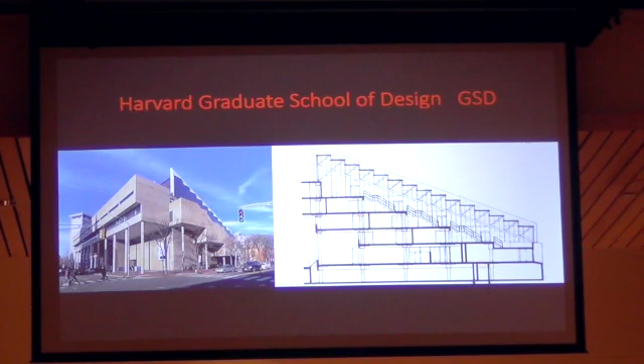That's the process I went through, and more or less you're going to see how it worked out in my case, because there's a lot of knowledge production in my case, and possibly very little design production, as it turned out by the facts of life, the way my life actually developed.

The first building I worked on was with a firm called Cambridge Seven Associates.

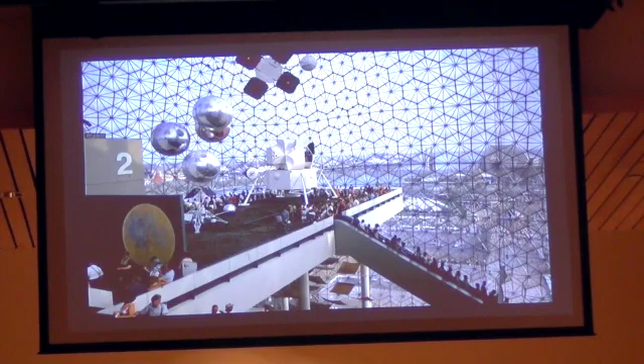One of the nice things I happened to do—actually, I must say I didn't do much of the design. A young designer working in a large office like this is primarily working on construction documents, working documents. So you get the opportunity to work on the details in such a way that you can also be creative in the details. For example, I designed, among other things, the railing, and on the inside of the railing you got all of the text describing all the elements in the pavilion. It was a very, very dramatic pavilion where, in fact, you're just moving through the air. You separate the problem of shelter from the problem of content, and that's why it was a very brilliant building—it's still standing today.

I then moved, after about 2 or 3 years, to another office, just to gain the experience of another office. It was called Sasaki, Dawson & DeMay—I think it still exists in Watertown as Sasaki Associates. It was an incredibly unique firm for being one of the first integrated practices in the United States, integrating architecture, landscape architecture, urban planning, and urban design—4 subjects working together to create projects, usually at a very large scale.

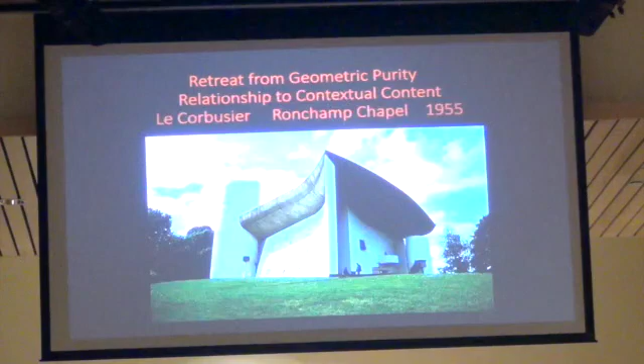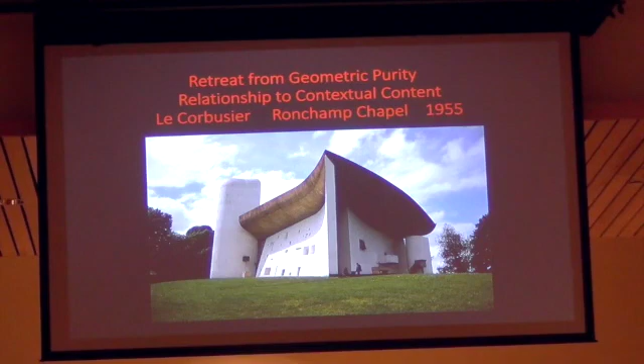So postmodernism tried to free things up. And it, by the way, became a cultural phenomenon. Postmodernism was not only in architecture, but it was in literature - postmodern literature, very, very famous, I think. And many other fields were transformed in the 1960s. The 1960s, not only the Beatles, but it was a great intellectual production during that period.

Learning from Las Vegas tries to take the theoretical part of this little book for a moment and turn it into practice, by coming up with an idea that he calls the decorated shed. The decorated shed - what does that mean? You could take a very, very simple building and be free on the outside. You could make a functional building, but decorate the outside any way you wanted to.

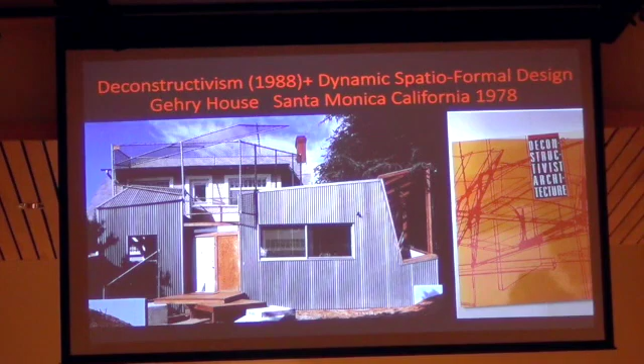So it starts by being iconoclastic. It starts by using new approaches to spatial design. It's not rectangular usually, it's quite angular in nature. And so the famous building, the so-called Miracle of Bilbao, another museum - the Bilbao Museum.

It's not stainless steel, it's titanium. Who knows titanium if you're not doing an airplane? You don't know much about titanium. In fact, this man works as a sculptor.

On most of his buildings he uses and promotes computer-aided design. He's one of the leaders, Gehry Systems it's called, one of the leaders in computer-aided design until today. And they did it on the basis of a system called CATIA, which was a French system that was used to make airplanes.

So in order to produce these buildings, you had to have computer-aided design. You could never do this kind of thing except by doing it with - they say Frank Gehry makes paper designs out of cardboard, you could only do it with cardboard, you could never do it without computer-aided design. So computer-aided design in the background of this revolution is making another kind of revolution for architecture. In the background, this horse is running.

I better move on fast so you can see the complexity and the spatial complexity. This gorgeous building, 2002, where the engineer Cecil Balmond is a great engineer with a fantastic firm called Arup, working with a Japanese architect called Toyo Ito.

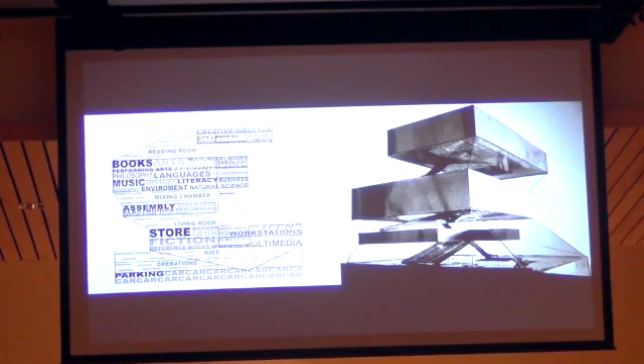It's very interesting because the program is written on the left, and you can see it's a series of pavilions in the air. The lines of structure connect those pavilions. So here the complexity is joining between the... sophistication is too much for me.

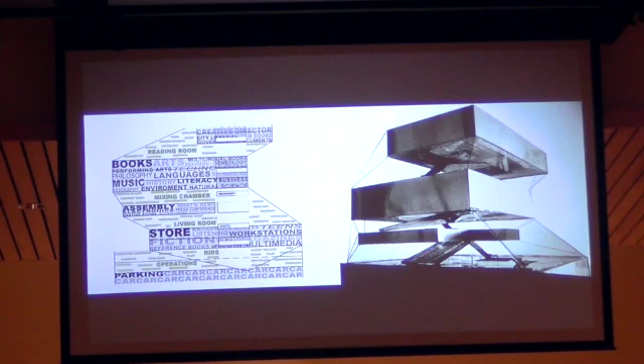The major parts of the library are closed, and then the open parts of the library that enjoy the view as well as reading, etc., are connected by the lines of the facade. So now I go back and just show you the facade for a minute. That's a rather beautiful building, despite the fact that it's very complex geometrically.

And in Israel in 2005, Moshe Safdie, the same year, is producing the Yad Vashem that I'm sure all of you have seen or heard of.

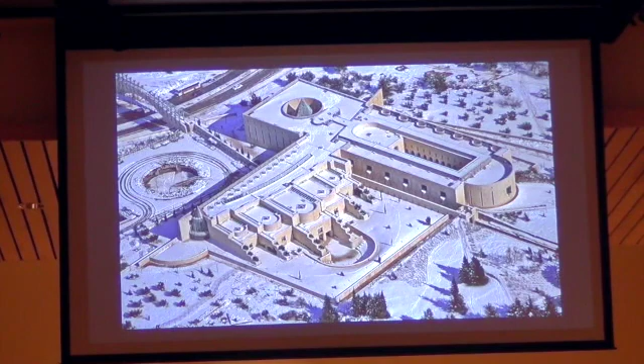Here you see it in the snow, so it's great - not only can you see the different organization of the building, but it's a really fantastic photograph of the building in the snow. So what do we have? Obviously it's not the usual courthouse. The courthouse is one of the most serious of monumental buildings everywhere in the world.

In this building, suddenly, it's kind of floppy. It's opened its wings to the environment, really. What you have here is basically - those of you who have seen it - it almost has no entrance. Whereas it should have a monumental entrance, it has no entrance. The counter logic of postmodernism is one of the things that's interesting. It makes you contemplate how the building is put together.

But very, very briefly, because I see that maybe here I'm getting along to the end. Well, I'm going to have to do this quickly. The parts of the building are - the entrance is on the side, you come through this main block. These are the major courtrooms. This courtyard is here. I'll show you in a minute these pieces.

This is the courtyard. It's completely classical. You see there are funny distortions. If your eye has now become able to understand how this work is taking place, you have unexpected sizes. And they're always playing with the keystone for some reason - the keystones are being large. The window is expanding in a strange way. So there are always special kinds of artistic treatments in postmodern buildings.

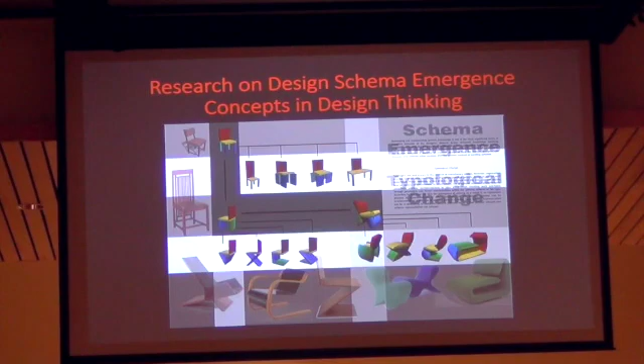This is another drawing. The basic idea was to research the thinking related to schema and type in design. Another work she did involved morphogenesis, or how nature designs. You're going to see this a lot in the way my daughter works. This is one of the important things about her work.

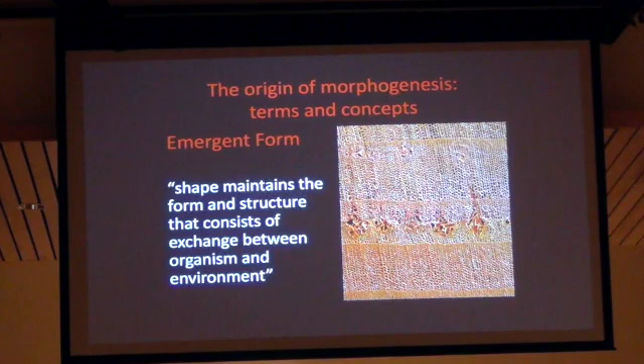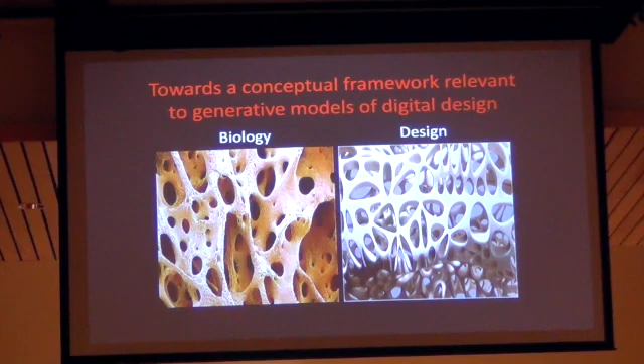How nature designs, and how this section of a tree shows that some event in the history of its growth produced this pattern. So there's a pattern of morphogenesis that exists in nature, and how can this help us understand how design might work, for example biology, bone structure on the left, and design on the right. How can these two things begin to come together? Those were part of her research works.

A third one, morphogenetic design. She also studied how architects use experimental designs. This was the great German engineer and architect Frei Otto, and what it turned into was designed on the basis of the model. She showed the model because she went to the University of Stuttgart, where they still have this research laboratory, and they only work with models. How can designers work with models?

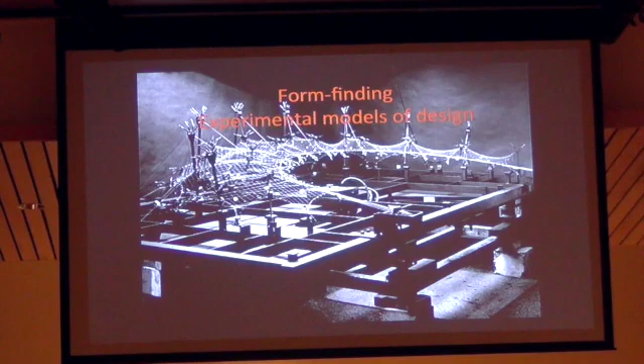Because he was really a master of working with models like this in order to design fantastic lightweight structures. It was called ILS, the Institute for Lightweight Structures. And this is, I don't remember, one of the Olympics in Munich.

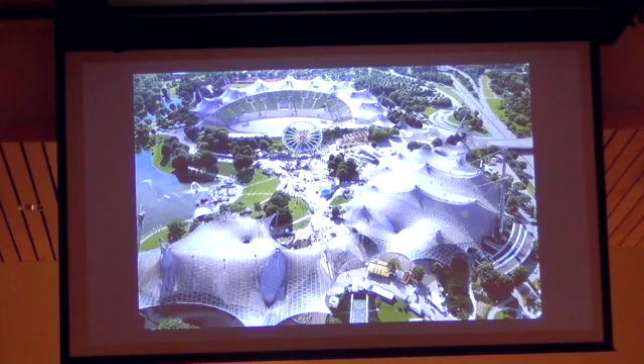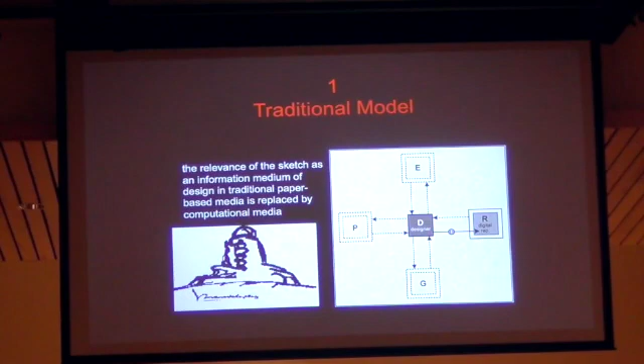Then she came up with a series of computational schema, or a diagrammatic approach to the way design takes place, with the designer in the center. He represents, he generates, he studies performance, and he evaluates. Going through this process in various ways, using students and professional designers, she came up with a series of designs based upon the conventional method of sketch design and so-called performance-based design.

In November 2017, just 24 months ago, for her research she received a doctor honoris causa from a great architectural school in Barcelona, which is super unique. I don't think there are many at the Technion, there's no one in our faculty. At this university, she was the first woman and the first architect to receive that distinction. So the work was recognized around the world.

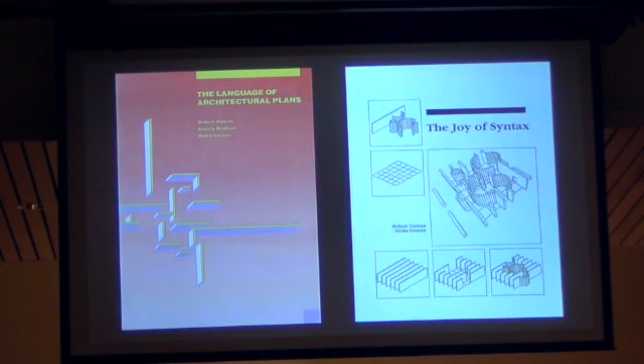This, just fast, some of our books. We did nine books together. And a little view of something that we designed.

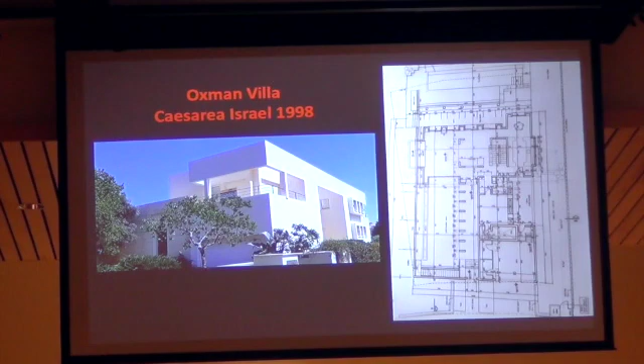It's a courtyard house, an L-shaped house around the courtyard. This is the view of the entrance, stone and stucco together. And just quickly, the entrance, the courtyard—it's got this long bench running the full length of the courtyard.

I was very interested in minimalism in design, another sub-form of postmodernism, minimalism. I still love it. This is the interior. It's got a thick wall because there are metal shutters that protect the whole house, so the shutters go up into these little boxes—they go into the thickness of the wall. Really great house.

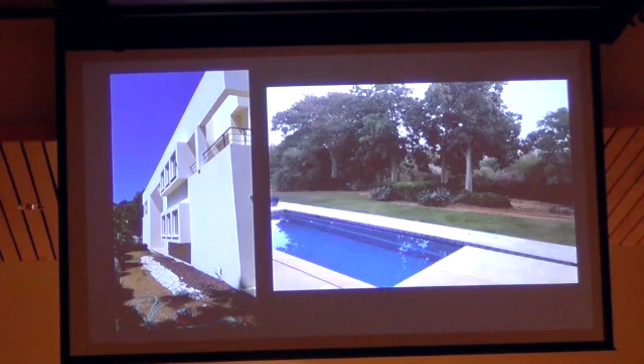All the same, you see it's the same stone on the floor as on the wall, but it's just treated differently. It has a beautiful swimming pool and garden. The windows are closed because they're cleaning the house.

Five minutes for Neri Oxman? Five minutes. We went over, wow.

Beautiful—first of all, she's beautiful, but her works are as beautiful as she is. She has a group called Mediated Matter. Very simply, it means how can digital fabrication change the potential behavior of materials?

That's all it means, Mediated Matter, but it's very, very complex because you have lots of digital media, like 3D printers that can create various kinds of things. So the video is called Then and Now. It shows she's only been working for nine years—some of the things she did as a student, then and now. Let's see if we can get them.

Every weirdo in the world is on my wavelength. It's a Thomas Pynchon quote, but it so well reflects what I felt when I entered the cube in E15 during the fall of 2006. It was late at night. There was a group of us trying to make sense of MAS 863.

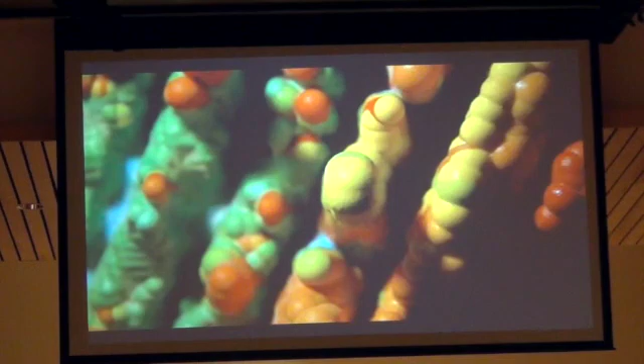What we came to realize was that we were about to embark on a journey. It wasn't a class, it was a world. Thinking about making.

And it was also about kindness, about making up for each other's lost math or found physics, learning how to knit while typing differential equations in Word.

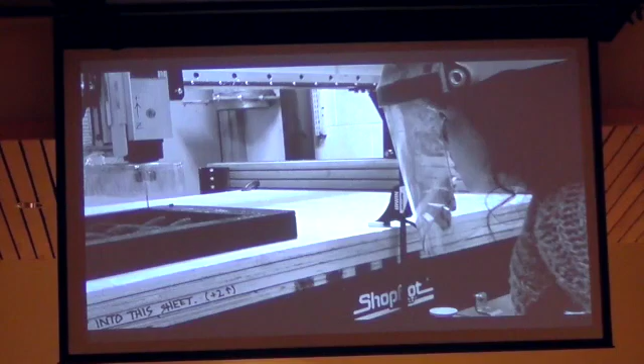My very first famous commission, for MoMA, came out of How to Make Almost Anything. I was working on flexible composite structures, integrating structure and skin into a continuous wall tiling system. It was designed to accommodate a range of mechanical, optical, and environmental conditions, such as structural support, light transmission, and heat flux. The project was called Cartesian Wax, and we spent the better part of 2006 working on it, like now.

Everything I learned from Neil, from Sherry, Amy, Yvonne, and the entire CBA team, Seen and Lamont and all - lots of love and dedication went into that project. The shop in Neil's lab was our coral island by night; by day we would catch up on food and sleep. If there was ever a class that entirely transformed how I make, it was How to Make Almost Anything.

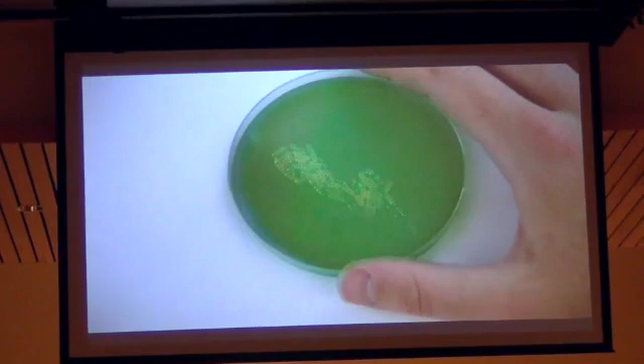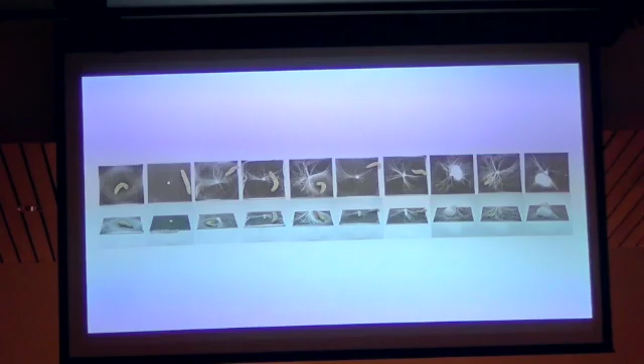Material ecology deals with the aspect of learning from nature as well, in this process of working with materials. We made a pavilion woven by silkworms.